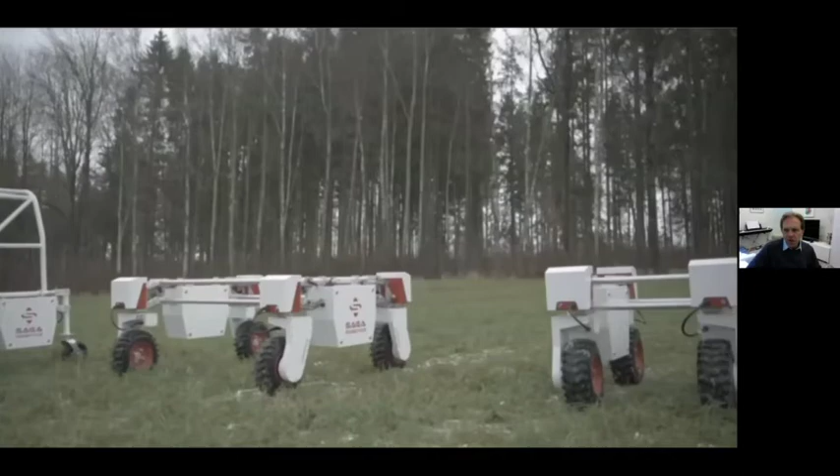We've operated around a fairly simple robot called Thorvald designed by the Norwegians. So the hardware is Norwegian, a lot of the software now is done at Lincoln. This is a lightweight robot, about 150 kilos, with a battery life of about 8 hours. It's a very modular platform, so it's very easy to adapt and change - you can put tools on top of it, tools underneath it, and cameras and all sorts of things.

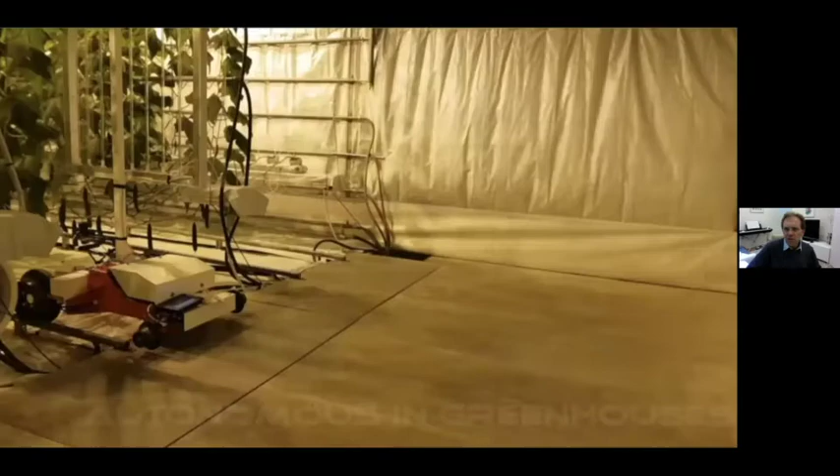And then some of the treatments - this was a great one - this is using UV to control plant diseases, and this is the same robot, actually, it's a modular robot. This is in tunnels using UVC to control powdery mildew, and this is the robot in Kent. We've got 3 of those robots in Kent this year, going up and down tunnels.

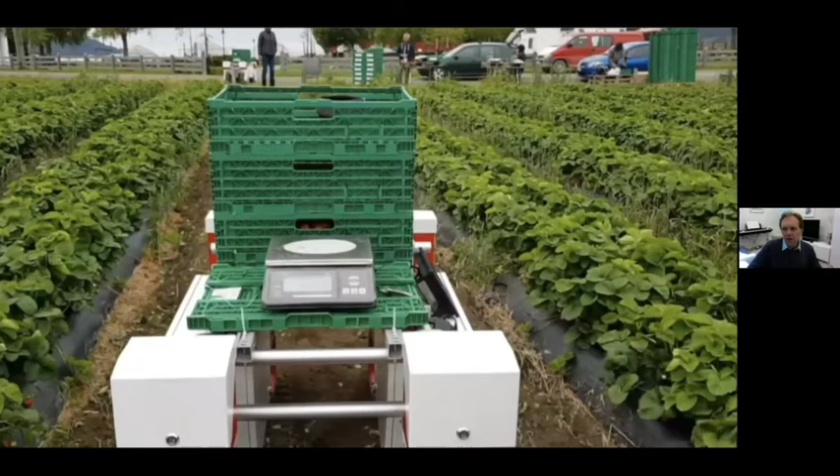Each robot is now doing 9 kilometers of tunnel per night, working very effectively at very, very high precision. So the autonomy of the robot is now very well established, and that's been a result of many hours of coding done by the team at Lincoln and colleagues in Norway and really across the UK.

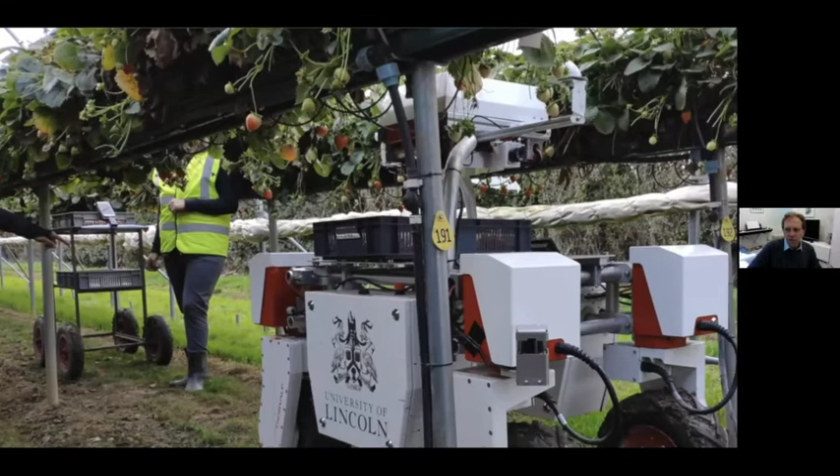So pickers are picking away, they press a button, and then a robot will come, take the fruit away and take it to a pack house. That drives productivity by about 20% because the pickers don't have to go up and down the rows with their fruit. Here you go, here's the robots, and they're going back and off to the pack house.

So that's now reasonably well established. We've done all this work at Lincoln. We've got a robot fruit farm at Lincoln, which is the world's first, a full tunnel and fruit setup. And we're now working on picking - this shows one of the options on picking, which is a cup gripper.

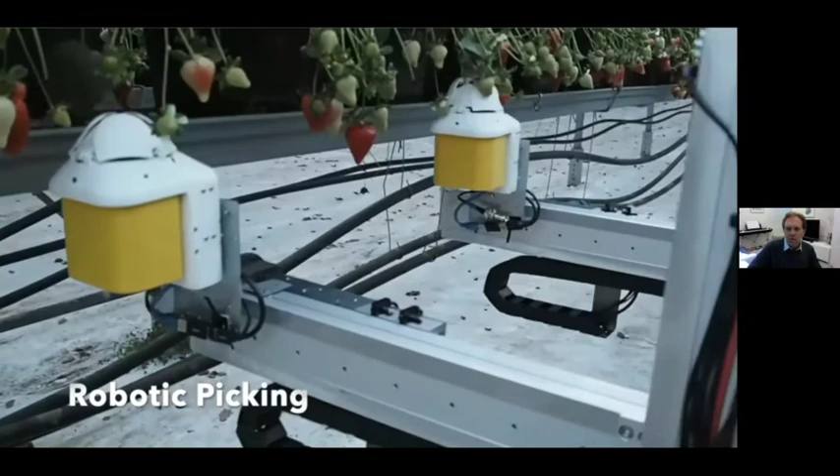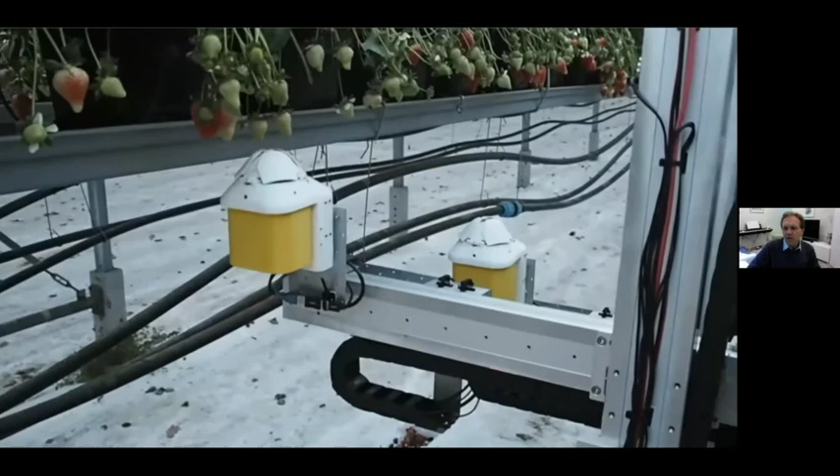Where the gripper identifies the fruit and then just gobbles it up, and then the fruit drops into a punnet. We're looking at other grippers as well. It's quite challenging because those fruits are very occluded. The machine learning side of it is very complex.

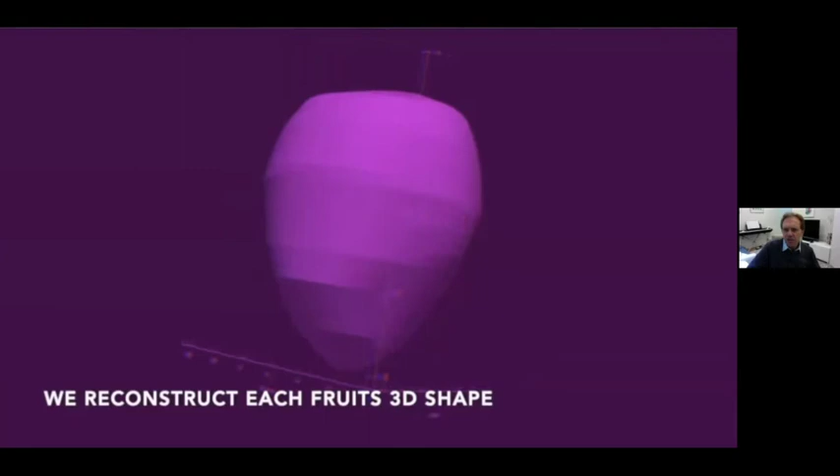So we're going to show you a video now. This shows what the robot sees, and you'll see the fruit there. It's measuring the size of the fruit, measuring the colour of the fruit, determining whether they're ripe, and then deciding whether to pick them. But you can also count them, and that's very useful for fruit forecasting. So if you know how many fruit you've got at this size - this is doing it in 3D, three dimensions, every single fruit - and if you know how many fruit you've got, clearly you can forecast, and that helps manage waste through the supply chain.

And this just shows a 3D model of the 3D world, of what the robot sees in the robot world when it sees a crop of strawberries. The system can actually identify each individual fruit every time it runs through. It's quite remarkable. And this just shows several days of data being collected where the system identifies individual fruit, measuring them daily.

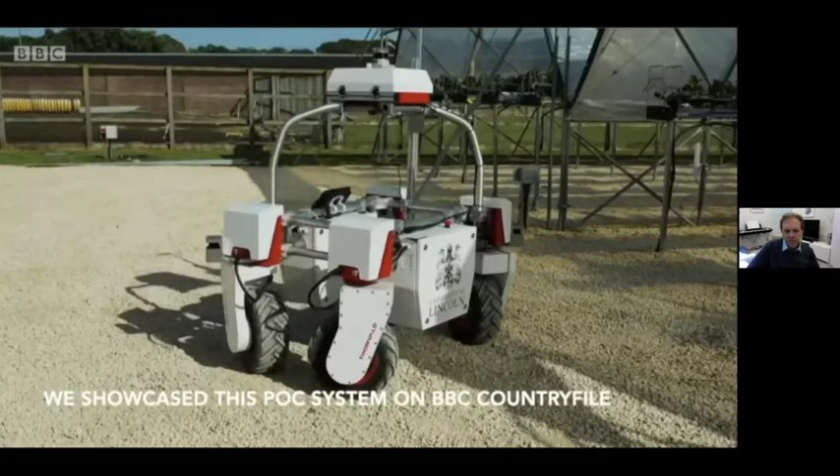What we're going to try and get you to do is count faster and more accurately than it can. So how does it count the strawberries? What is it looking for? Yeah, so we use vision. It's going to use this camera right there, looking at the row, and it's going to detect the position of the ripe and unripe strawberries.

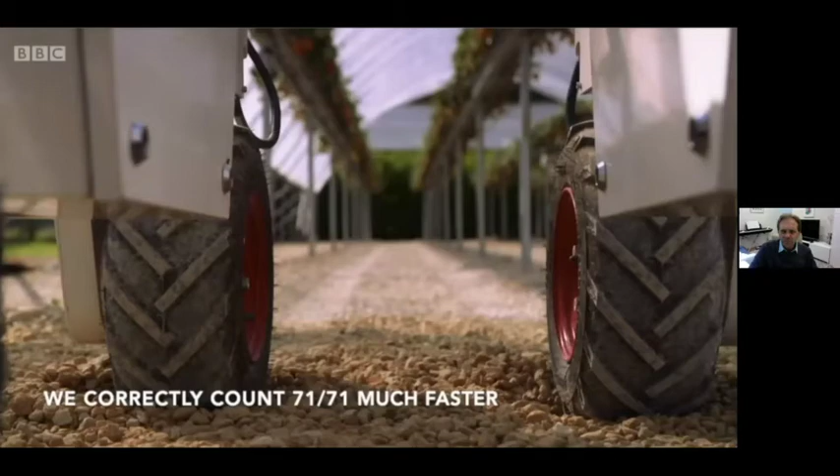This space tech strawberry counting race is on. It's time for me to pit my wits against this robotic rival. 3, 2, 1, blast off. The fruit count is on, and I'm giving it everything I've got.

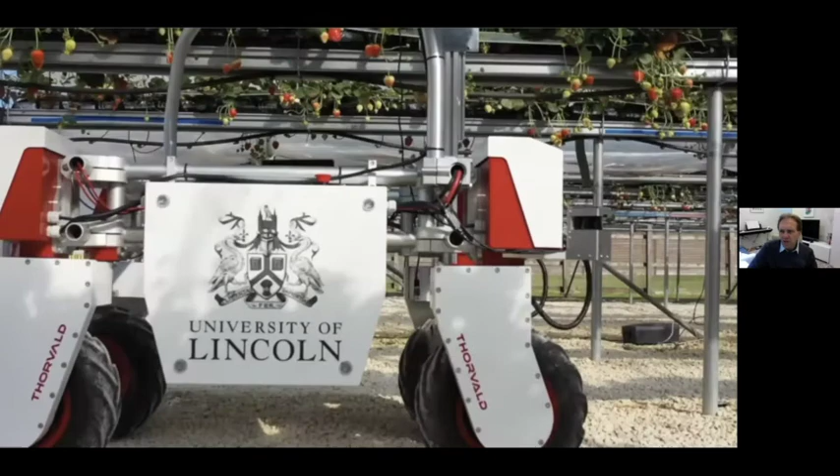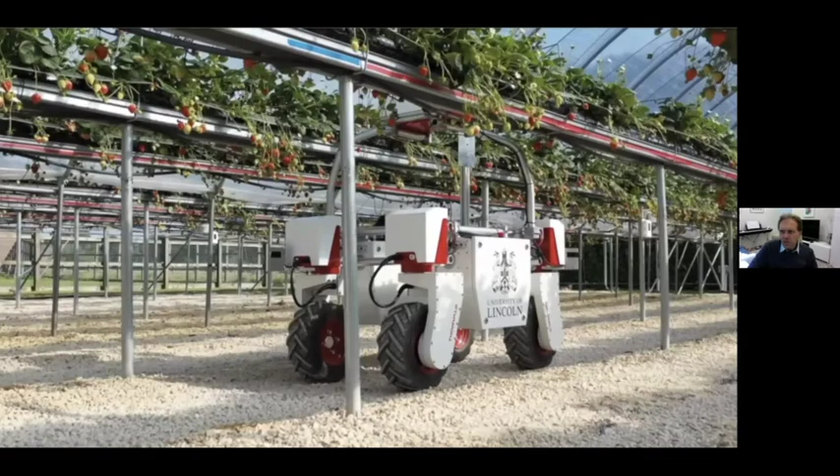So what we did there was challenge the Countryfile presenter to actually beat us at fruit counting. It's like a Top Gear challenge. We did a number of challenges on Countryfile, and the robots won every time. So we're getting to a stage where we're more and more confident about the technology, to the point where we can challenge presenters on TV to beat us. So that's what we've done on soft fruit robotics, and it just shows you some of the technology that's coming up.

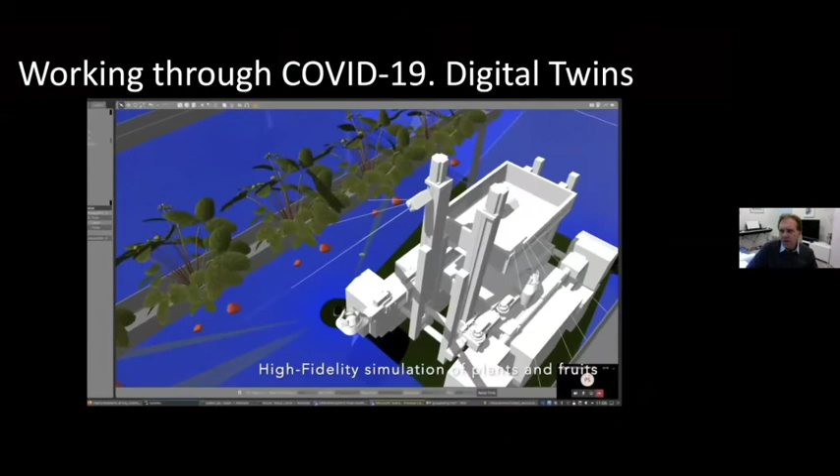And how have we done it, and how have we worked through COVID as well? Well, most of it, and this links to Lean, has been done through a digital twin. So we work absolutely in a digital world when we design these applications, and this just shows the full robot being simulated in a digital twin called Gazebo.

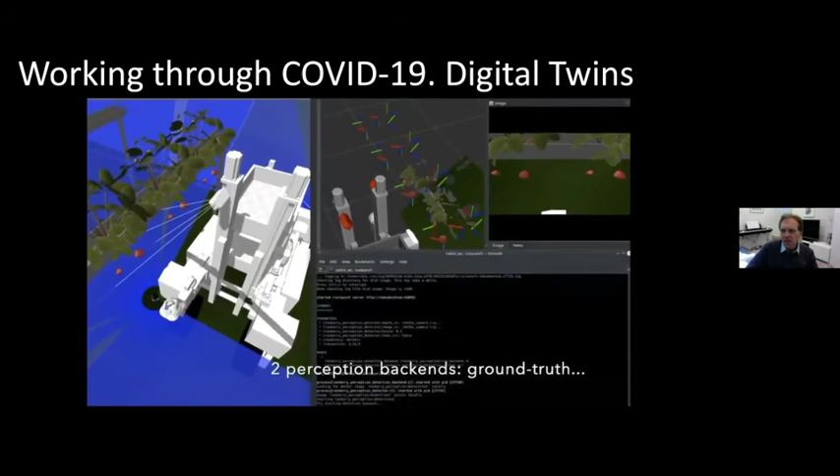You can see the robot there, you can see a picking arm there that you've seen in the video. This digital twin has a full control system - it's got all the sensors, it's simulating all the LIDAR scans, it's simulating the 3D cameras which are detecting the fruit, it's simulating how the fruit moves if they're touched. Rather like Newton's cradle, you can touch one fruit and all the rest will bounce, so that you can really understand how to detect complex clusters.

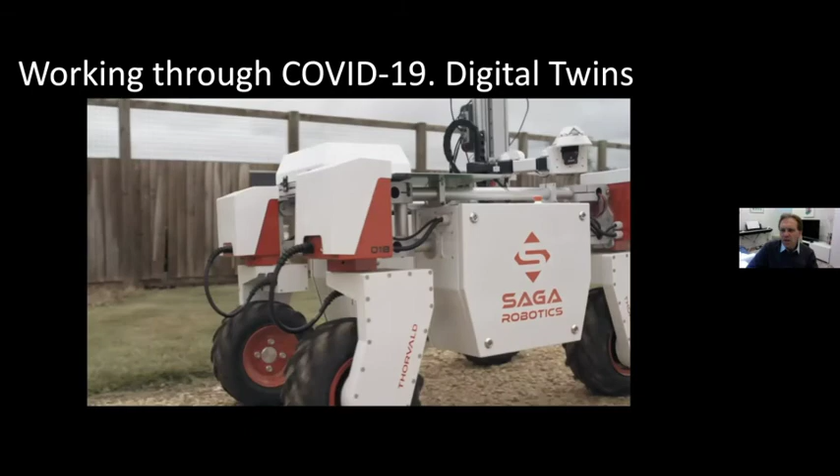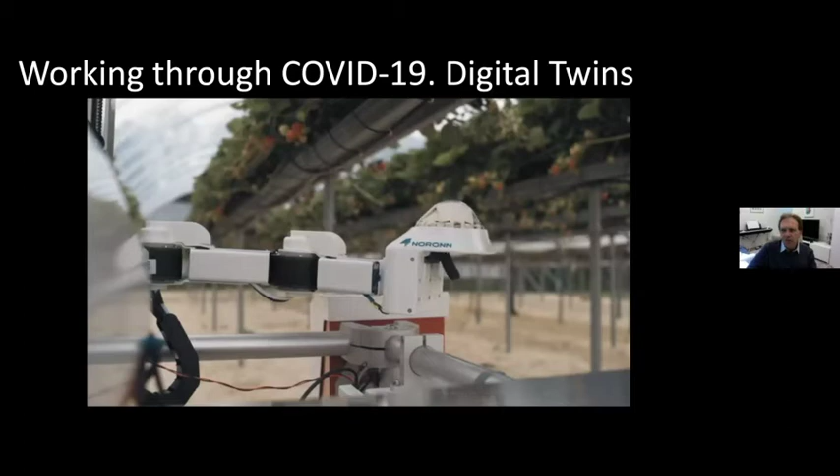So we've done this through the spring because of COVID - we couldn't do any physical work - and then more recently we've been back out in the live environment. This literally was the first run after the spring, working from the digital twin, and you can see the similarity between the digital world and the real world. And this is the gripper coming up, it's the first fruit that is found. It's a bit slow because we turned it down, but you can see it working, and all of that programming was done

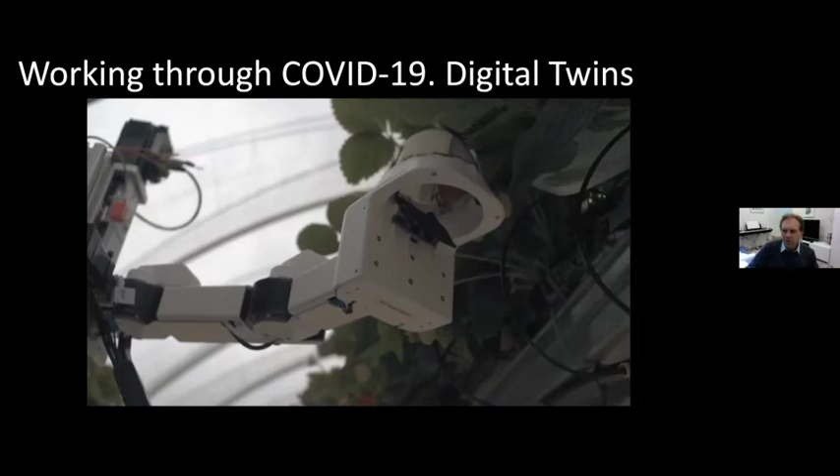in the digital twin through the COVID period. That's the direction of travel for many of these robotic systems - it's digital design, it's lean design, designing before you actually go into the real world. And here we go again, this just shows another one - it's picking away, finding the next fruit, going up, picking away. So that just shows the direction of travel and how this is all being designed.

So that's a bit about robotics, and now I just want to reflect on the future and unknown unknowns. We don't know what the future is going to be whatsoever. Clearly there's lots of concern about use of heavyweight vehicles in agricultural systems - perhaps it needs a rethink. I'm not entirely certain, because you've got to think about the physics of agriculture. The force and energy required for things like ploughing is immense - far, far greater than what you'll get out of a standard battery at the moment. So what is going to come in the future? Well, I don't know. Nobody knows.

I think we're going to see a world of smaller robots, perhaps, in agriculture. I think we're going to see medium-sized machines, tractors, and a world of big machines as well. We're going to see a fused world of many different technologies. What joins them up is they're all going to be intelligent, interoperable, integrated, and data-driven. The future will be around data-driven technologies in agricultural systems, with new sensors, more intelligence, more precision, and all these machines working interoperable in a smart way.